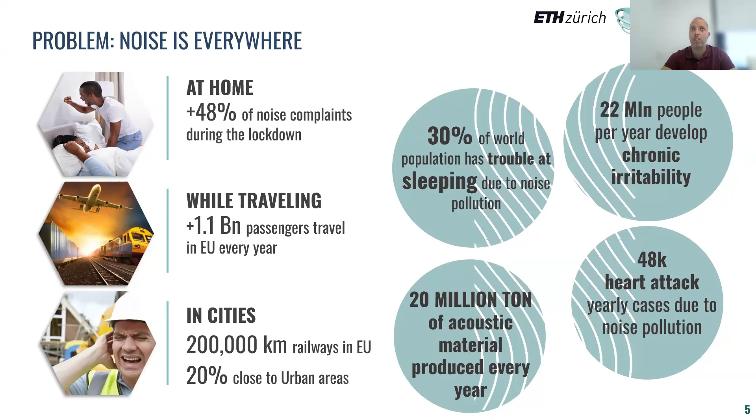Why did we choose to focus on noise or vibration? Because noise is basically everywhere. You can find it at home, as an annoyance while traveling in cities. It is responsible for a lot of health-related issues. Therefore, controlling or reducing noise and vibration can bring overall benefits, health benefits, as well as reducing the annoyance of whatever system creates this noise. Therefore, our motto, our vision, is the art of noise management.

Through our experience in noise and vibration related subjects, we developed effective, affordable, and sustainable solutions based on metamaterials, relying on existing materials or new structures or new materials. How did we do so throughout the years? We developed different applications. Therefore, we have a portfolio of 13 patents for different sectors.

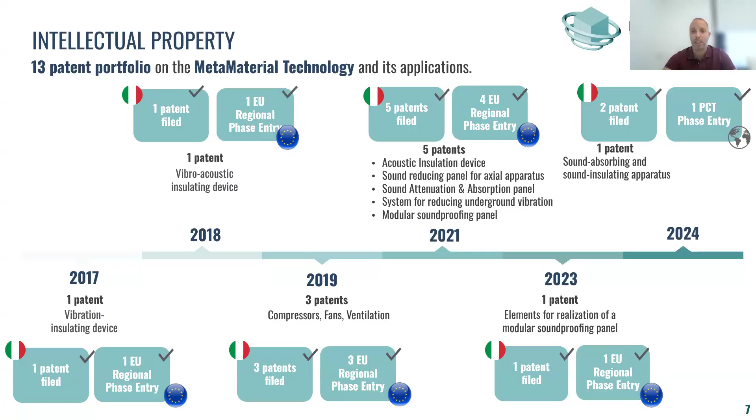But aside from all these words, maybe it's worth spending a bit of time to discuss what metamaterials are. Probably you're already working on metamaterials, most likely. Some of you are from Greece, so metamaterial is actually a Greek word; it means beyond materials. So we are not inventing a new material, but basically creating a new structure. We are modifying the structure topologically in order to control the propagation of energy in it. If we can control the propagation of energy in the structure, we can block it, deviate it, modulate it, and so on.

Before continuing, I want to ask all of you, are you experienced with metamaterials, or is it something new for you, or you just started? No, part of the group has worked with metamaterials, but not the whole group. So not totally. Your introduction.

So maybe I can spend a few more words. In general, metamaterials means all the types of structures where you can, as I said, change the topology, change the shapes to create local resonances, or create scatterers to control wave propagation. For these local resonances, for instance, in these pictures you can see features designed with an endpoint mass and a slender body that works as a mass-spring structure, or that can work like a really bulky structure scatterer.

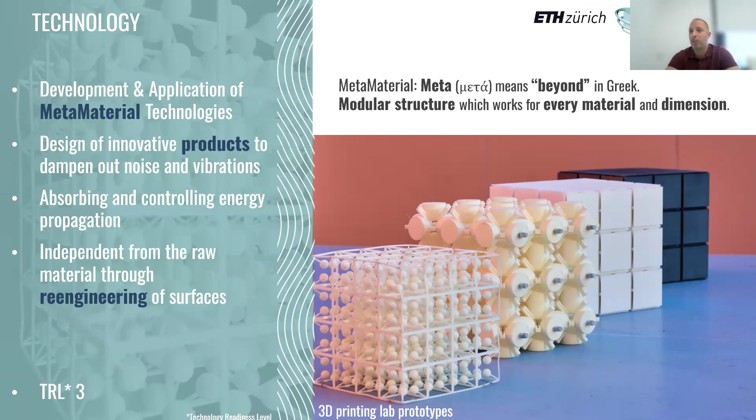So a higher TRL means that in a product, and normally the TRL goes from one, which is basically an idea, a concept, a sketch, a drawing on a paper, to 9, which is basically your final product that you can buy. So the question is, how did we scale up from a low TRL to make metamaterials into product? This is really the focus of our company and what we are working on actively every day.

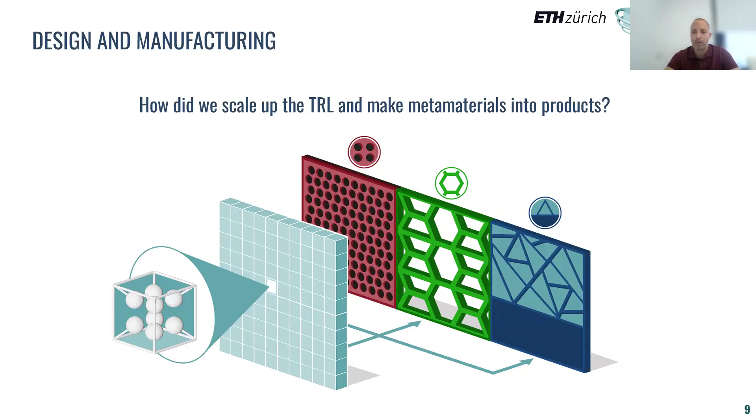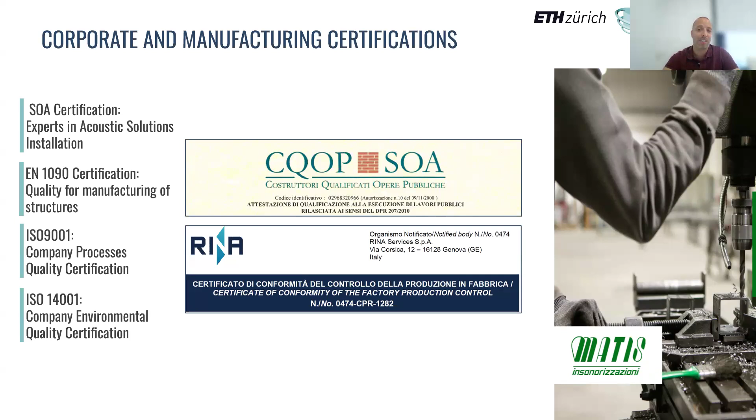So we started from the cube, and then we reshaped it, we remodulated it, we changed the topology in order to make, for instance, barriers, different shapes, or other types of products. Well, first of all, the company needs to be ready for preparing this product. So legally, it needs to have some bureaucratic stuff, for instance, certification, which is really important for companies. But aside from this, you need to focus on certain sectors. So we decided to focus on 3 verticals: the infrastructure sector, transportation sector, and appliances sector.

Each of these sectors, so we segment it, we divide it, because each of these sectors has its own features. So the type of material that it is possible to use, the type of problems, and the type of manufacturing aspects. Therefore, yes, the performance of metamaterial is exactly what we are looking for. So we are looking for a new technology that is much more performant than the current technology, and therefore we can reduce the noise or the vibration in an outstanding way. But then we need to face the costs, the material, the manufacturing aspect, which, if we segment in this way, is really sector specific.

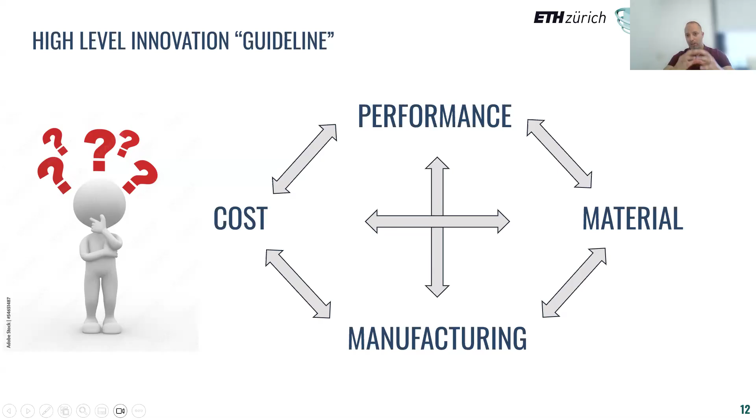In this presentation, I tried to give you an overview of how we deal with it. And probably that can be a trigger for you, for everyone, for the community, to make sure that when you design a new metamaterial solution, you put also all these 3 parameters in your metrics, and then you optimize it in a general sense. You don't look only at the performance, but you can look also at the design that includes the cost, the material, the manufacturing. Therefore, you create a solution that overall is already ready for being commercialized. But to get to that, let's start step by step.

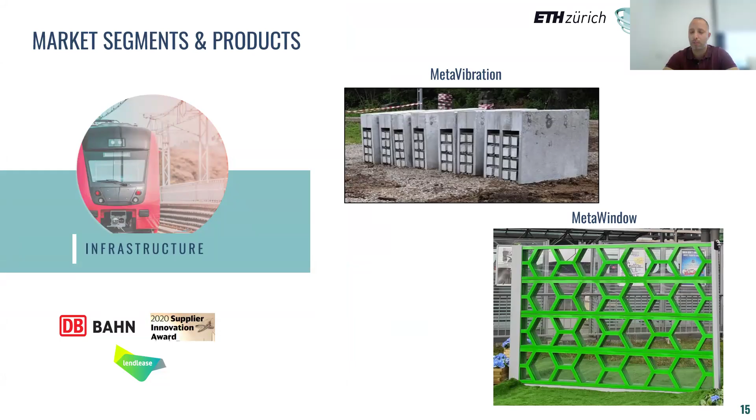So for instance, let's start with the infrastructure sector. So for the infrastructure sector, we work in 2 directions. We work for reducing the vibration, the ground borne vibrations, or to reduce the airborne emissions from, in this case, railway noise. Let's focus on the vibration. So we developed a product which is called Meta Vibration. What does this product do? So probably you're working on something similar, but what did we do?

So we have a vibration source. In this case, the train on the railway track is creating different types of waves, surface waves, P and S waves, that travel into the soil and then can damage or create annoyance in the buildings. So typically, you create some solutions into the foundation, so you create trenches. These trenches are very useful for blocking surface waves, for instance. But there is a problem with the trenches. Trenches are holes in the ground, so they are dug to create an interruption of these waves from the input to the receiver.

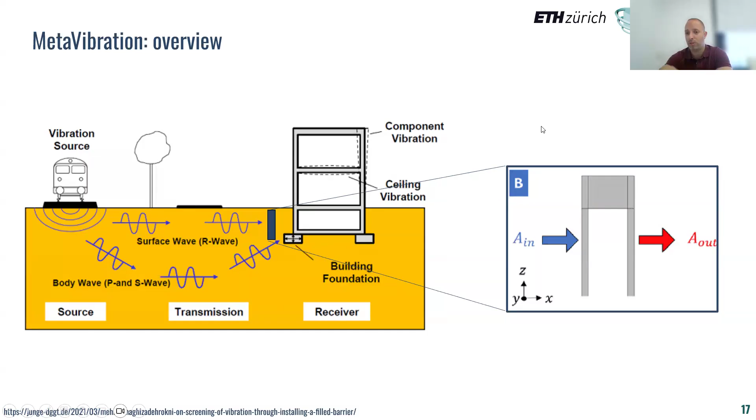And therefore, it's not always safe to have a hole in the ground, especially if there are some machineries or cars that need to pass along that way. Therefore, instead of the trenches, typically they use some decouplers like U shape or inverse U shape that can still work as a decoupler. But the question is, can we do better? Can we trigger resonances inside these decouplers to increase the isolation from the source to receiver? This was exactly the first question.

So the objective. And then in terms of innovation, we create a solution to improve the isolation at low frequency, and especially the annoyance, or at least the problem, is located around 30 Hz. And the main challenge is to integrate this resonance structure inside this solution. And aside from this, the resonance structure needs to have a bearing load capacity. Therefore, heavy structures need to be able to pass over this solution. And also the cost of the material and the manufacturing need to be aligned with the current solution.

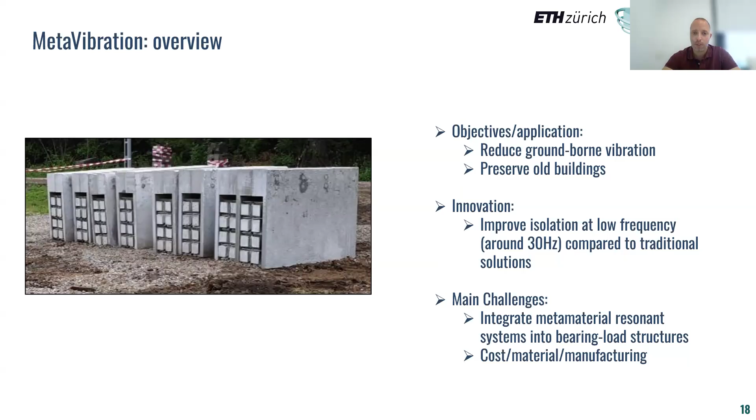So where did we start? We started exactly from the unit cell. We started exactly from a design which looks really similar to the cube that I showed you at the beginning.

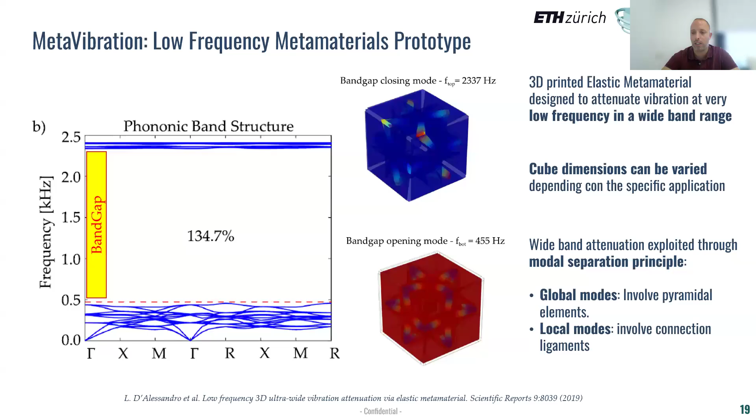Through stop band analysis, we design features inside this cube, resonant features that can enable a very large stop band in the low frequency range we are looking for. In this range, we have no wave propagation, so we can block the energy propagation. If we block the wave propagation, we can ensure the energy from one point to the other is not passing, and therefore we can maximize the insertion loss and isolation in this frequency range.

From the unit cell, we created this cube that you saw in the pictures, and then we tested it in the lab with a sensor and an actuator to verify that the stop band is according to what we designed it for.

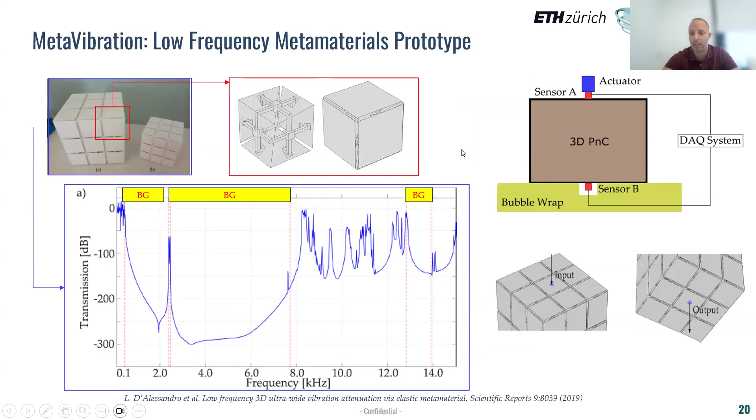Then from the concept, from a low TRL, we made the first prototype, made with the same material as the final solution. We chose concrete and steel, because in the infrastructure sector, metal and concrete is basically what is used the most. But you can imagine we need to create a resonance structure made of concrete and steel. How did we do that?

We use the steel as a spring and the concrete as a mass, which would have been the most logical thing to do. But this had to be tuned first, and secondly needed to be molded. The mold was one of the key points for the manufacturing aspect, because it's what creates and leads to the final product.

So we create the solution, we test it, and the solution is behaving according to what we were looking for. The cutoff frequency starts from 30 Hz onwards.

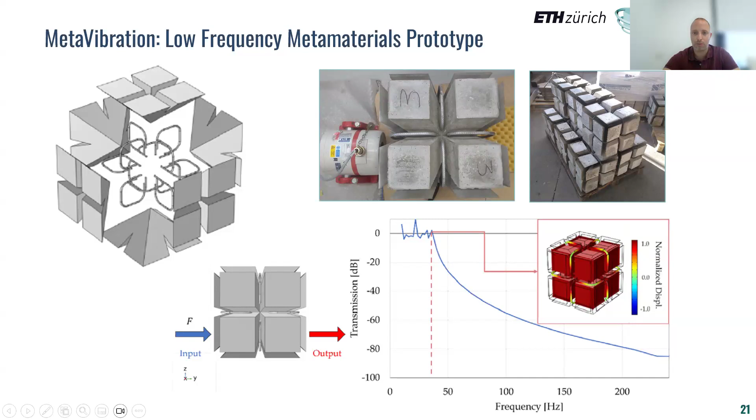Then we inserted these blocks inside this structure, and this structure mostly serves to preserve that the dirt, the ground touching the resonators, is not blocking the resonators from vibrating. This is the reason why we encapsulate this array of resonators inside this block.

With the simulations, we can demonstrate that if we have a train track here, an excitation that comes from the train, we have the vibrations and the energy propagation that can freely travel. When we add the blocks, we can really increase the insertion loss from left to right, from these trenches, from this solution.

Of course, we can block the surface wave, but the wave that travels underground is more difficult. But it is at least a good achievement and not too invasive a solution to be applied for controlling ground borne vibration.

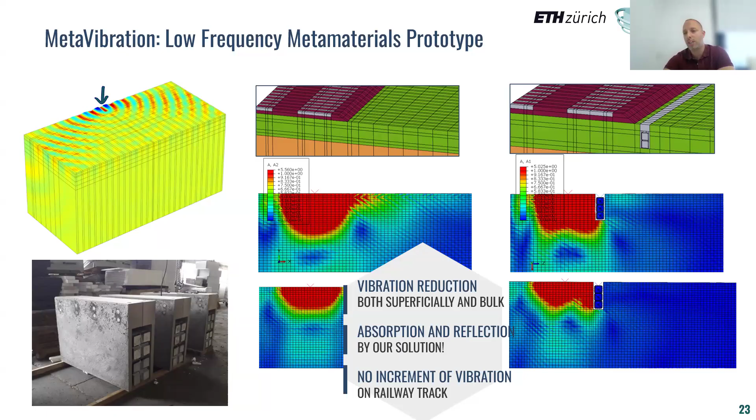Another aspect is, okay, we create this amazing solution, now this needs to be installed. When you design and make all the numerical simulations for your solution, you never imagine that there is a person who will take your solution and throw it into the hole, into the ground, without really taking too much care of it. They take a crane, drop it into the ground, put all the dirt next to it, and then decide it has to work. So they don't really care too much about how to treat them.

So what I'm saying is that when you're designing a solution, you never imagine that you also need to design it to be robust enough, not only to work as intended for blocking the vibration, but to withstand potential mishandling, people that take this and while installing it are not really delicate. This is another aspect that sometimes a designer or engineer focused only on vibration and noise doesn't really take care of. An example is exactly this: the environment in which this solution will be installed is not the most perfect environment as a lab environment.

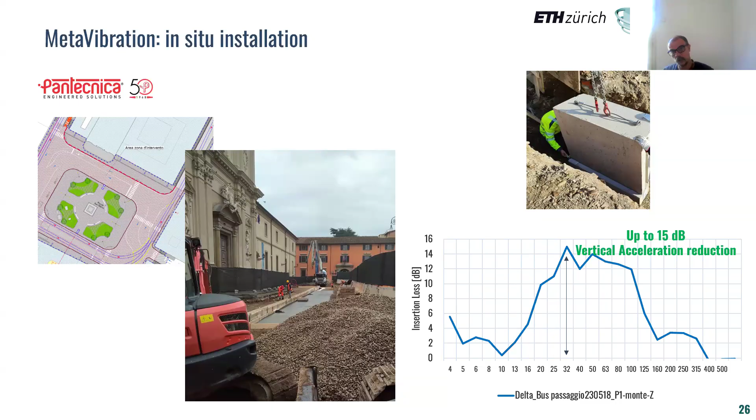Exactly. The point here is that the resonators, or the resonances, need to be triggered such that they can be pushed to as low a frequency as possible. So let's say you have an excitation of 2 hertz—you need to make sure the mass resonates at 0.5 hertz or even lower. So at the end you start to have, as you said, a much larger mass, but you're in a certain sense at a threshold where the structure can really withstand or self-support itself. Exactly. Probably this design isn't really the most effective for earthquakes—there could be other, more intelligent designs—but typically the principle is similar.

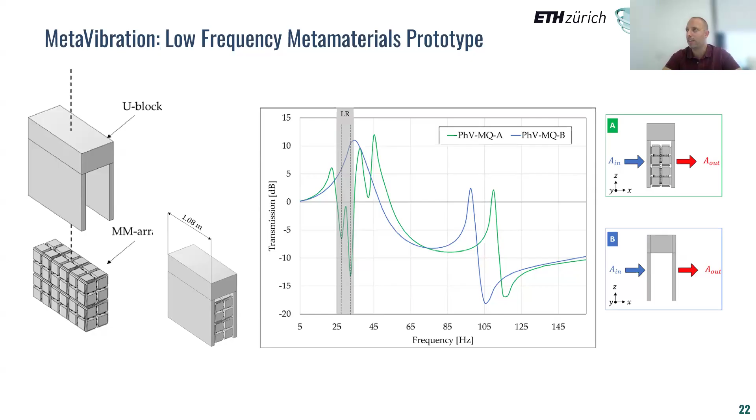Okay. Thanks. No, thanks.

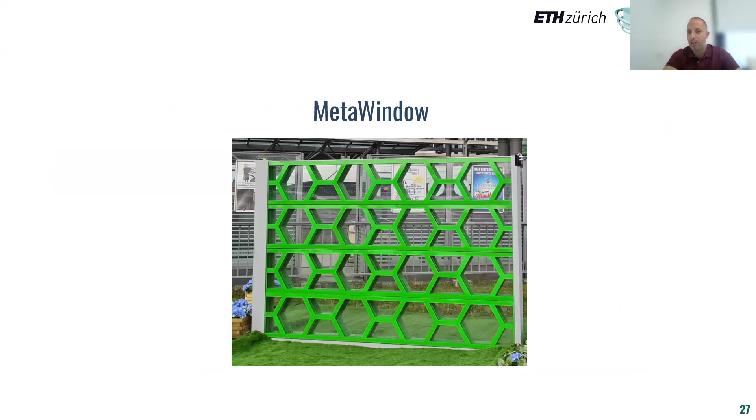So now we have discussed ground-borne vibration. What about airborne vibration—airborne noise, sorry. This is typical noise in infrastructure that could arise from the passage of a train. You can find these solutions if you travel on a train, or you've seen them on the highway. There are transparent barriers, as well as barriers that are not transparent—they are full and closed. The transparent barrier allows you to see the landscape but doesn't absorb the noise, it reflects it: the wave hits the barrier and is pushed back. For the full closed barrier, you don't see the landscape, but the sound hits the barrier and part is pushed back, while 90% of the sound is absorbed because inside there is foam absorbing material that dissipates the noise through thermoviscous losses.

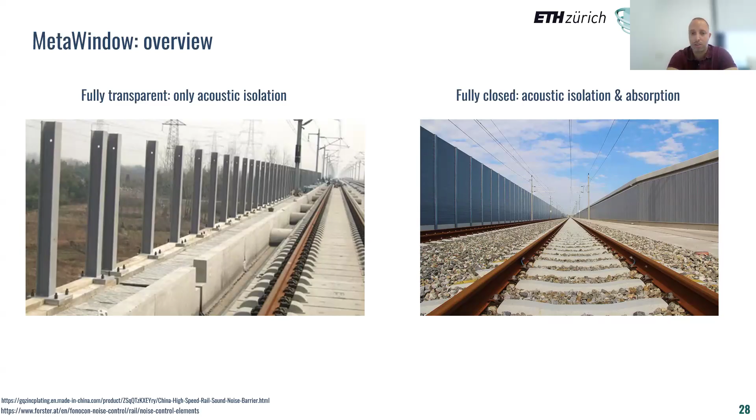The question is: is there a solution we can design that lets us see the landscape, so it's transparent and therefore doesn't have an urbanistic impact, but at the same time doesn't just reflect the sound but absorbs it? Can we make a transparent barrier that also absorbs like a full barrier? This was actually a question raised by Deutsche Bahn, the German railway company, and we worked towards this design.

It's called Meta Window—our product. It's a solution we are producing here in Milano; we have a manufacturing plant producing this window. It is 70% transparent, so you can see through it, but it also combines high absorption. High absorption means that in railways, or typically also on highways, there's a reference curve for isolation and absorption. If the performance of your solution is above this reference curve, it's considered high absorption. According to this standard, the Meta Window behaves as absorptive as a full barrier.

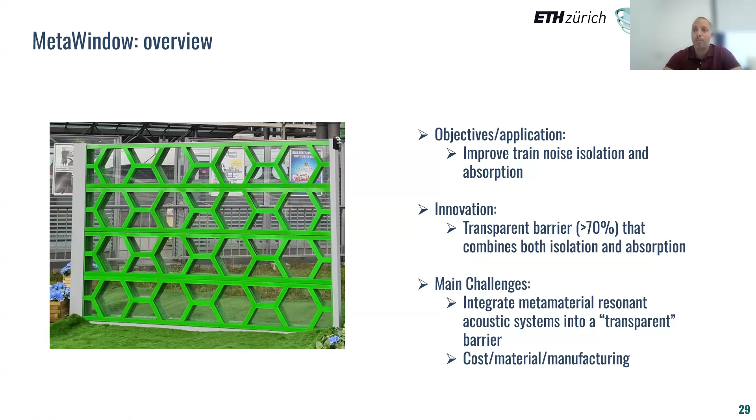But here, cost, material, manufacturing is everything related to industrialization. And industrialization is core, as it is for other products, but here specifically because in the market this barrier must cost around 400 to 500 euros per square meter. So you need to make sure that if you want to be competitive and you want this solution to reach the market, it needs to be designed in the easiest way, using the most simple, common materials, to make sure you can be competitive and land it into the market.

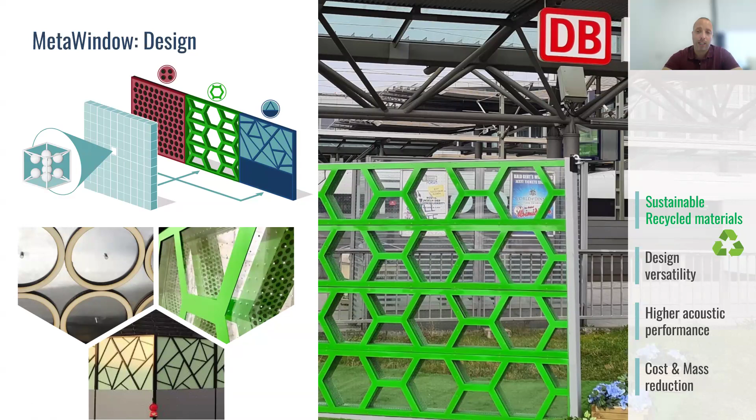Therefore, here, what did we do? We tried out different shapes. We started from the cube. We had to enable, first of all, the resonances. So we needed to first reach the target for the acoustics, and then afterwards we needed to make the system work. Hexagonal shape was a perfect design, really amazing to work with and to achieve very good performance, but it was very difficult to make, very costly.

Therefore, we redesigned everything into sort of linear shapes that could be manufactured by extrusion, and extrusion is a manufacturing process that is much simpler and more cost effective than this type of process.

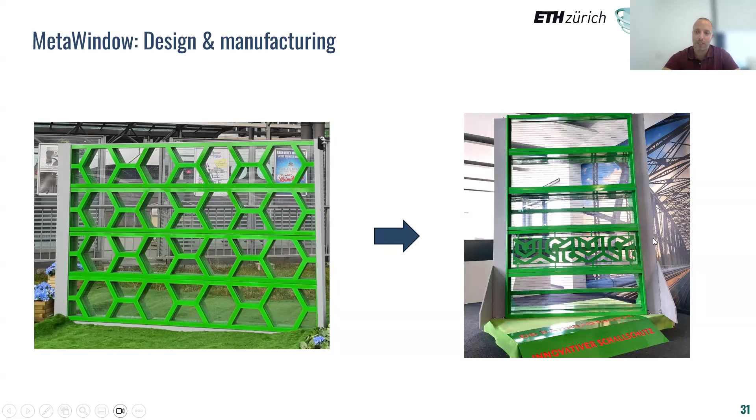Once we have the design validated in terms of performance, through tests that we made in a reverberation chamber to verify the isolation as well as the absorption of the meta window, there was one test that took us almost 1.5 years to pass, which is the fatigue test. So you have an amazing product that works for isolation and absorption, but then you have a block which is basically the fatigue test that had to run for 6 months.

We failed it 2 times, almost at the end of the fatigue test, because of a small crack that opened up next to a screw that wasn't tightened very well. The fatigue test is fundamental because you need to imagine this barrier needs to resist 50 years, needs to last 50 years next to the train track, and needs to withstand the pressure load of a train running at 300 kilometers per hour close to the barrier. So you have a suction pressure that overloads the huge panel of the barrier, so it needs to withstand all this cycle of fatigue.

So once again, here you are designing for metamaterials, but afterwards there are other engineering problems that need to be taken into account, therefore needing to be added into the design. With this message, what I'm saying is that when you design a nice solution, it's not only vibration and acoustics in this sense for metamaterial that can really make your system great, but there's another 90% of things that probably, until your solution reaches the final industrialization, you don't even see.

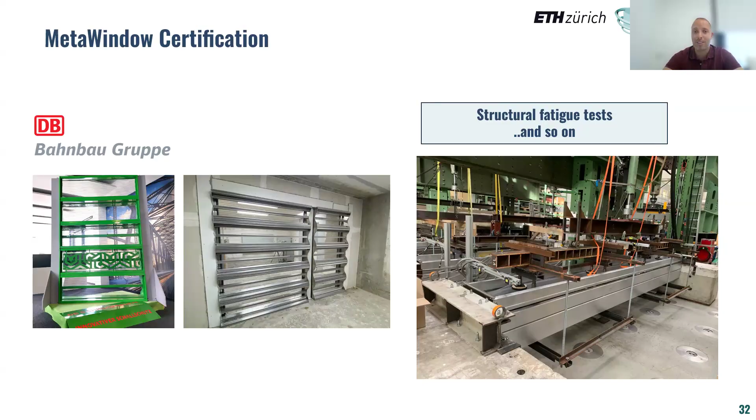This actually has already been installed. So if you are in Germany, around Munich and Hamburg, you can see this installation live. There are also some pictures on LinkedIn and on the website of Deutsche Bahn about this new product. So after a lot of effort, that has become a reality. That's what I'm saying—so what has been our journey?

So we had our objective, which we wanted to design some high performance absorption isolation solutions, metamaterial solutions for infrastructure. We have come up with two solutions, which are the meta vibration and the meta window.

For infrastructure specifically, we have seen that concrete and metal is what is mostly used. But why is that? Because the infrastructure understands in terms of material mostly this type, because they are cheap, they are easy to retrieve, and so on.

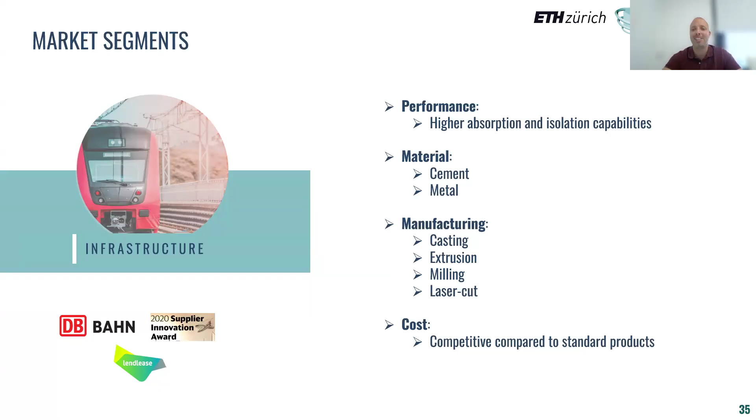Okay, this is the infrastructure. What about the transportation? I don't know if there are questions so far, but otherwise I can continue. Okay, we can push the question at the end.

So the transportation, let's say, is another world. Why is it another world? Because in transportation, we are looking for a different type of solution, or at least what transportation wants is something that is lightweight, something that is super high performant. And of course, in transportation, you don't use concrete. Metal, yes, but you don't use concrete. Which type of material do you use in transportation? You use fibers, you use rubber, you use polyurethane foams, and so on. These are typically the materials that you use, so lighter material than concrete.

And in transportation, we are working a lot, say in automotive, for instance, with Mercedes, with Ferrari, Bugatti Rimac, and Nissan. So we are working with several companies, and specifically with Mercedes, we have designed, engineered, and produced a new solution which is called Meta Design. A fun fact about Meta Design, this is the name of the product we have, is that we did not call it Metamaterial anymore, but we had to call it Meta Design, to hint that when we first presented the Metamaterial solution, people thought it was a new material, although we explained that it's not a material, it's a design. It's a different topological design.

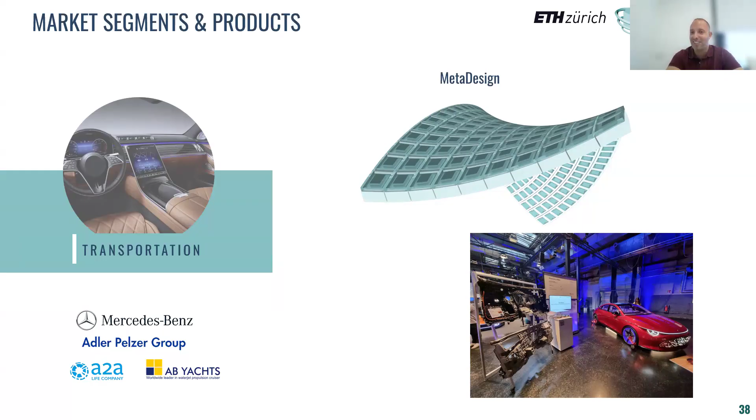Then which type of design did we engineer here? So we started by understanding which type of problem we can address here with the metamaterial. First of all, if we take a car, we have different types of energy transfer paths, or noise transfer paths, or vibroacoustic transfer paths, let's say in general. So we have powertrain noise, road noise, wind noise. One of the most annoying noises, especially for not battery electric vehicles but internal combustion vehicles, is the powertrain noise.

Here you have the firewall, which is a metal part that divides the engine compartment from the interior compartment. This firewall is basically a wall, and on top of this wall there is the sound package. This sound package is typically quite heavy. If we look at the one for Mercedes, for instance, you have 10 kilos located only in this area, and then you say, okay, 10 kilos on a car that weighs almost 2 tons.

What is the matter? But actually, it is the matter, because every kilo that you reduce, you can reduce a lot the emissions, the CO2 emissions. So every kilo, actually every gram, in a car is important. That's why there is a trend you find more and more in vehicles, that there is only the screen with lots of features, and you don't have buttons anymore. They remove the buttons to reduce even further the weight, and the cost, of course. So this is crazy if you look at it in terms of relative weight, 2 tons of car, and then you reduce 1 kilo. Yes, because 1 kilo counts a lot.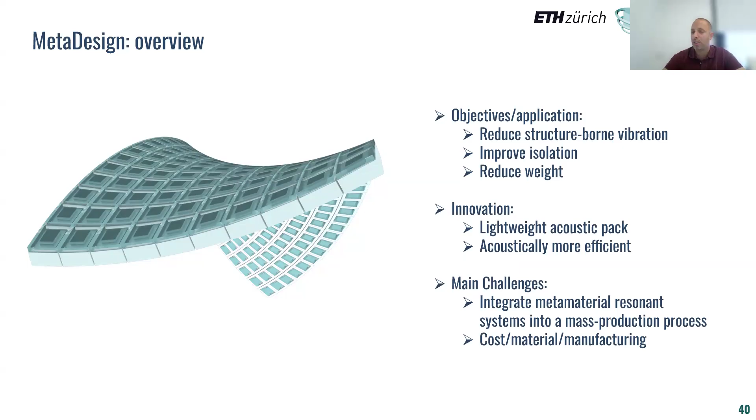And the innovation is to come up with an innovative lightweight acoustic pack based on metamaterials in order that it is acoustically more efficient. You can imagine that the main challenge here is the integration of the metamaterial with the current solutions, and especially here we are speaking of a mass production process and about 1 million vehicles per year. So the cost needs to be maintained, it needs to be easily manufacturable and robust enough that, for the speed of the manufacturing process, we make sure that once it enters into the car it works as intended.

Just to be clear, the standard design here uses standard materials such as polyester fibers or foam and so on with rubber, materials that have been used for years in automotive. So there is a bit of inertia also in changing this type of manufacturing, this type of material. Therefore, we said, first of all, in the design of the solution, we will not change the material. This is a strength of metamaterials because you are not changing the material, but you are integrating a design into a current material. And this strength enables us to maintain the manufacturing process, maintain the materials, and therefore to roll out the solution in a faster way.

And how did we design this? We designed it in such a way that we create local resonances, so distributed lumped mass spring systems into the design. Each of these resonances works at a specific frequency. Typically by design, we try to make it work at a specific frequency that opens up a stop band, so a frequency range where we can improve isolation.

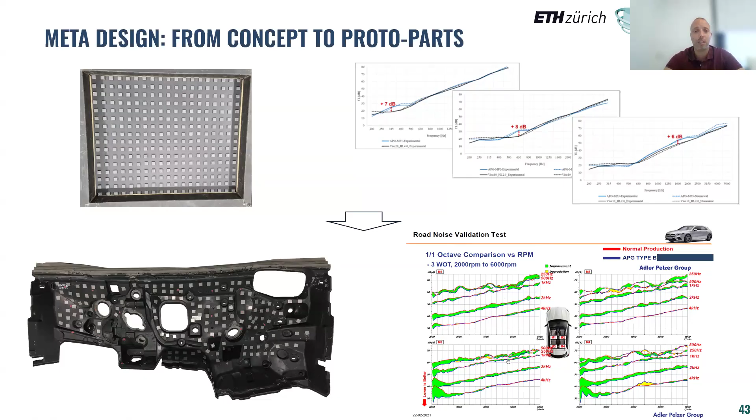And we started from a 2D design, from the unit cell 2D design, and then we applied it on a 3D element, which is basically the inner dash element in a car. And we tested it in a car. We did lots of tests on the bench, in the coupled chamber, on the vehicle while driving. And afterwards, we had to integrate it into the industrial process. In this case, the industrial process is called CIM, compound injection molding, which basically is an injection molding.

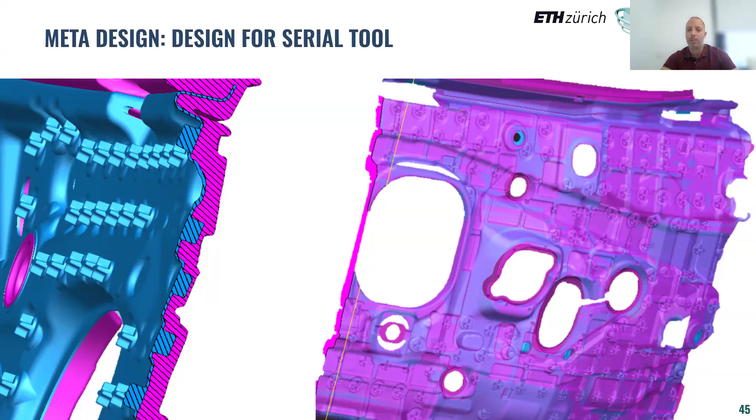And you can see it a little bit in the shadow and the translucency, this square section. So basically the combination between this added mass and this square cavity inside the foam leads to the performance that we designed it for. So this is the final product.

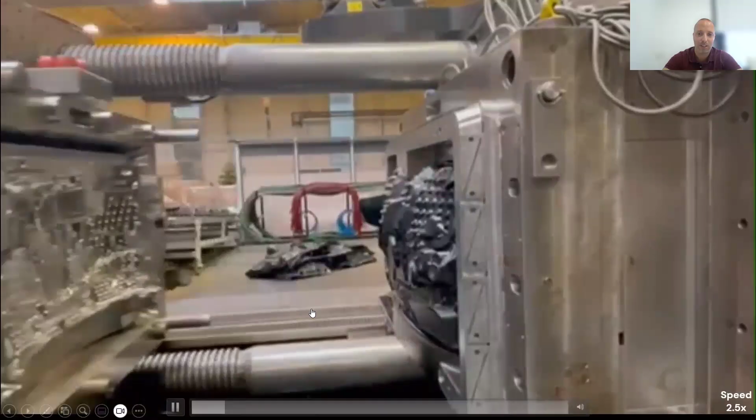And to give you an idea how fast the production of this material is, this is a video where the part is injected, then taken by a robot, carried away, and then you start with another injection. The video was sped up by 2.5 times, but okay, it is not that much slower than the video looks.

Just to give you an idea of how a simple design that you make on the console, on your FEM model, afterwards needs to encompass lots of certification and other aspects, and needs to withstand the industrial environment, for instance a robot that takes it with the pliers and then takes it out from the mold and so on.

So this meta design, basically, of course, we are the engineering company that designed the system, but for production, we did a partnership with a tier 1 supplier, which is Adler Pelzer Group, and they have the warehouses and the industrial plants all around the world. We are not there yet, so we don't have the plants all around the world to make the production for Mercedes. But thanks to this collaboration, we could bring the solution inside the new Mercedes CLA. So if you're curious enough, you can buy your CLA, you can strip it down and look for the metamaterial solution.

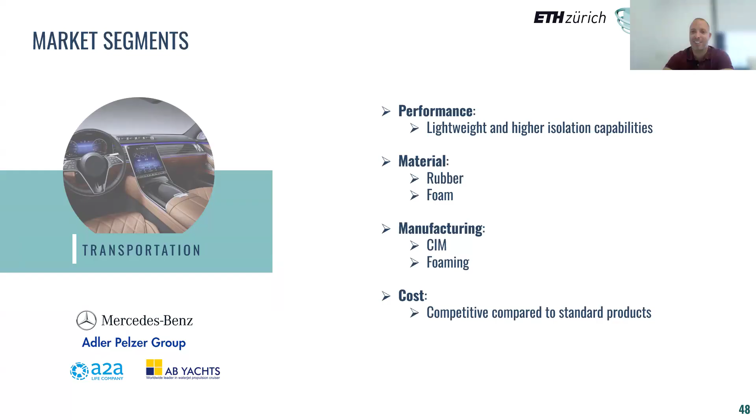Since you said that... you're fading a bit. Your voice is fading a bit. I cannot hear you really well. Okay. I will try to speak up. Now it's better. Now it's better. Okay. I don't know if you heard my question.

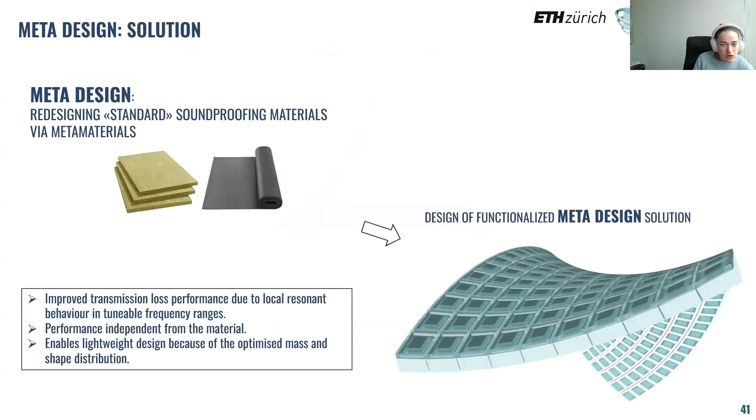I was saying that you said before that you were suggesting two solutions. Like one was more lightweight. Yes. This one. But the acoustic performance was the same, and the other, for the same mass, you had an enhanced acoustic performance. Which solution is typically preferred by the automotive companies? That's a very good question.

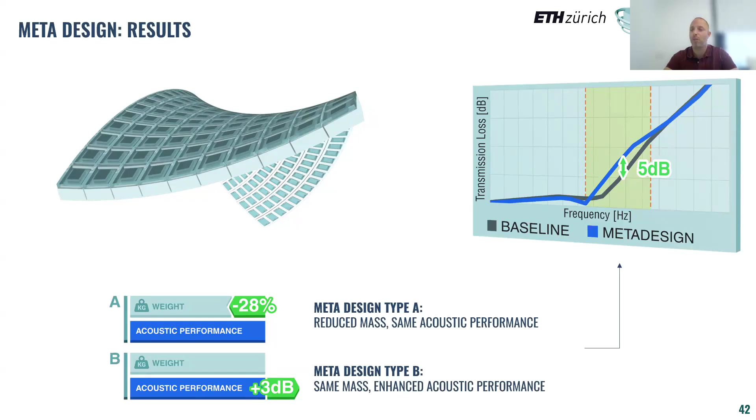Typically they always try to go for solution A, but there are premium cars. For instance, for Mercedes, there is the S class or the Maybach that are kind of limousines. They are really crazy cars for rich people. They look for comfort. So if you look for comfort, you can go for option B. But let's say 80%, 90% of the time they go for solution A because, as said, they try to reduce as much the weight, reduce as much the material that you're using in the car, but still maintaining the equal acoustic performance. Okay. I see.

No, I guess you can continue, we should be able to wrap it up until 11. Yeah, so I'll be really quick for this one, and then I'll go for a great summary.

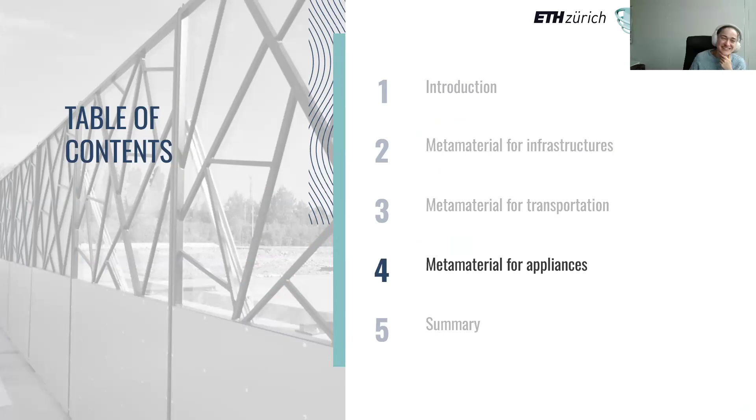For the appliances, here is a sector similar to automotive. Here we are looking for solutions that are very cheap because for appliances we go for kitchen hood, fume extractor, washing machine, dishwasher, and so on. For this, we have developed a solution which is called Metapanel absorbing, basically a micro-perforated layer with a backing cavity. What is the issue here? The standard solutions that are used basically use melamine foam, which is an absorption foam, and they cover it up with a layer.

So they want a very good solution, which is called melamine. Probably you know it. Melamine is very good in acoustic absorption, but because of fumes, dust, grease, and so on, they need to cover it up with a layer. Therefore, you choose a very good solution, but then afterwards you cover it, you basically spoil all the acoustic performance.

In fact, you can see it here in the graph: the acoustic absorption of the melamine foam rises and increases steadily with the frequency, where one is the maximum absorption and zero no absorption. Low absorption for low frequency, but it's normal. When you cover it up with this layer, you get just a bump of absorption around 2000 Hz, and afterwards the absorption is very low. Therefore, it's not really an ideal solution.

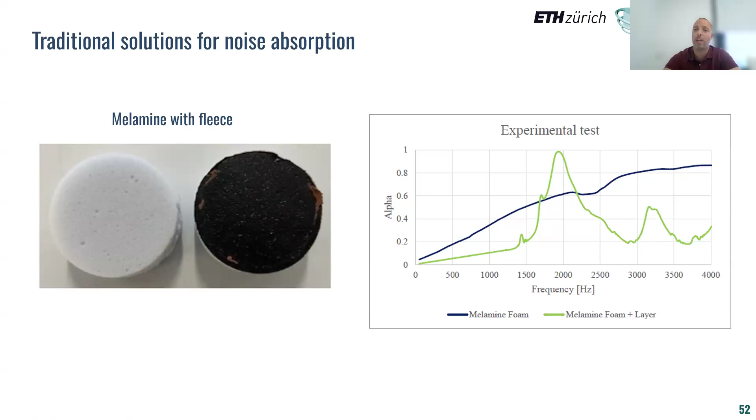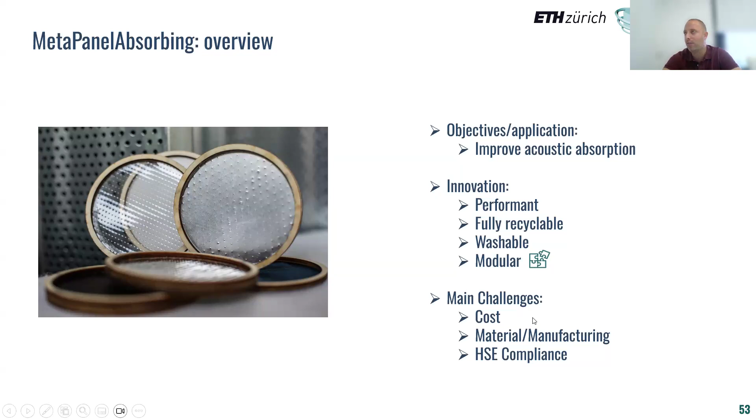Here, the thing is, mostly for appliances, we're looking for absorption, so acoustic absorption and reduction of the noise, and not isolation. And the solution has to be modular for sure, washable, fully recyclable, and of course performant. The challenges, of course, are costs, manufacturing, HSE compliance or health-related compliance.

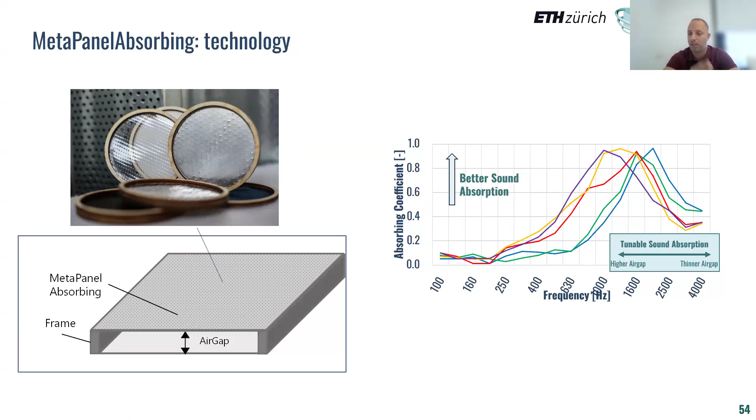As said, we have created this solution, which is a micro perforated panel with a backing cavity. Why did we choose this backing cavity? Because this can shift the absorption coefficient to where we have the most critical annoyance in the frequency. And this enables us to fine tune our solution and address more specifically the noise that we are looking for.

How did we do that? Also here, given that the solution is really cheap, we needed to find a manufacturing process that is also really cheap. It's made with a continuous process with cold micro perforation, in layers, as well as injection molding for the backing cavity.

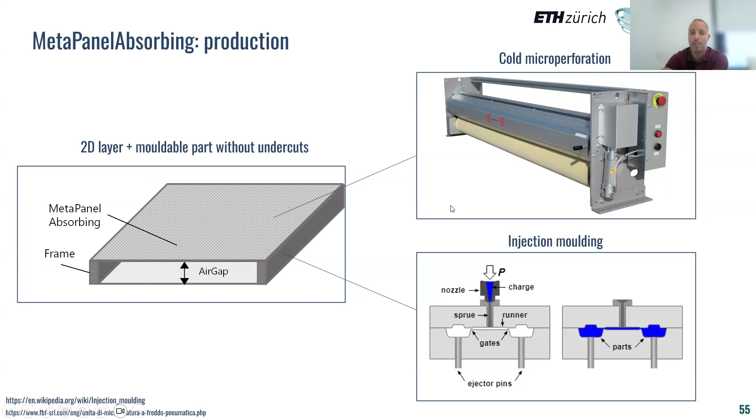And this enables us to, for instance, apply this solution in a kitchen hood. This is with a very well-known kitchen hood manufacturer in Italy called Elica, and we could reduce the noise emission of a kitchen hood appliance by 2 to 5 dB.

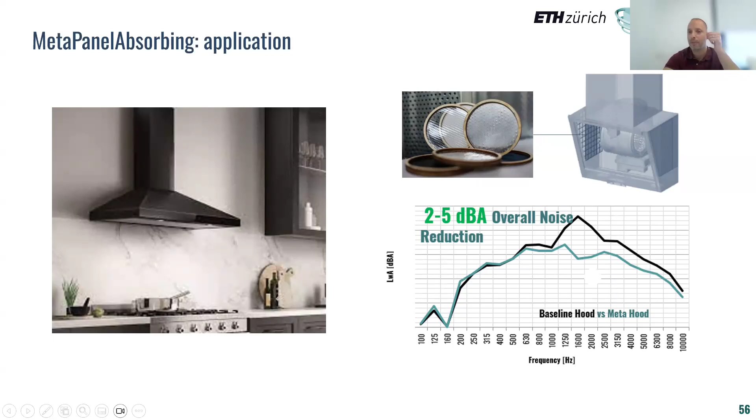It depends on the work rate of the machine, but this is the peak that, thanks to our solution, we could kill. Therefore, you get a more flattened spectrum, and with a more flattened spectrum you get better noise quality.

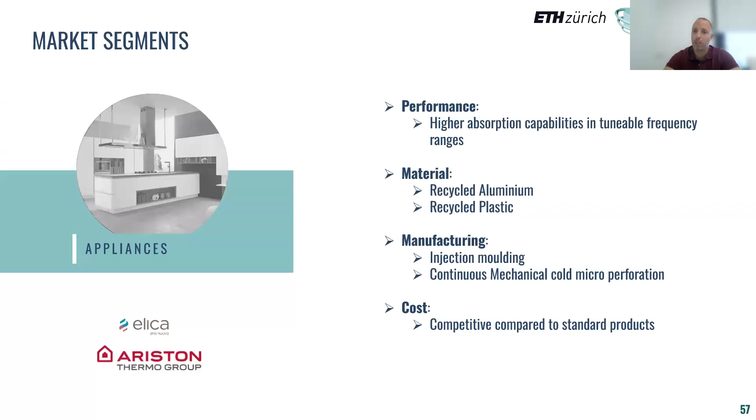So once again, the topic of this market segment is that it's very competitive in terms of cost. Therefore, our solution needs to be competitive as well compared to the standard product. And again, here it's different from automotive. It's a different type of material, different type of technology. Therefore, you need to rely on plastic or aluminum, for instance, for the manufacturing of this solution.

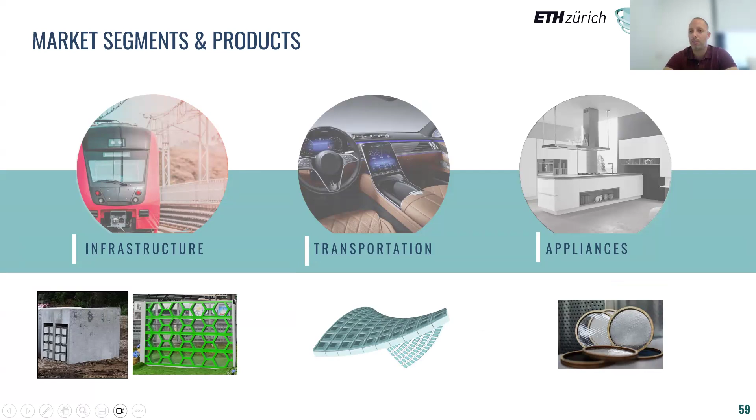To summarize, we have explored three verticals: infrastructure, transportation, and appliances. Each of them has its own type of material and production process. And if you look at the overall performance metrics that we saw at the beginning, of course we always look at performance, but there is a big part of the design which relies on cost, material, manufacturing. The innovation guideline that we have learned in the field is, first of all, you need to comply with the material which is currently used in the sector. This already saves you a lot of headache.

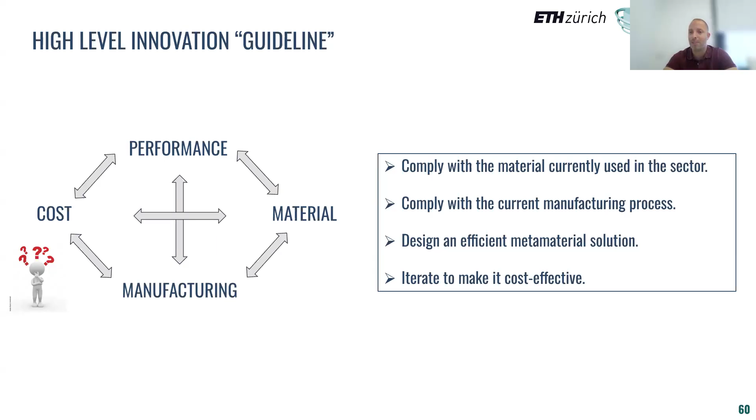You need to comply with the current manufacturing process. This really enables you to bring the solution into the market. And then, of course, design an efficient metamaterial solution, taking into account these two bullet points, and then iterate to make it cost-effective. I know these 4 bullet points could be quite obvious at the end of this presentation, but this is the guideline that we keep iterating on every day to make this metamaterial solution a reality. With this, I thank you for your attention.

I think I've been a bit longer than expected. I don't know if there are specific questions in the remaining time, but I'm happy to reply, or you can drop me an email later on. No problem. Thank you very much, Luca, for your presentation. It's actually okay. We also answered a couple of questions during the presentation, so I guess we are on time. So, are there any questions from the audience online? You can unmute yourself and ask any questions to Luca.

I don't see anything, but I can ask a question. You said that the goal of the company is to increase the TRL of certain solutions, take it from one level and bring it closer to application, right? Yeah. So do you have collaborations with institutes or universities where you take their solution and try to increase the TRL, or are these solutions that you have already developed in the past and are now increasing the TRL?

Yeah, that's a very good question. We work in both directions, in the sense that there are projects in which a company comes and says, okay, I have this solution, how can we make it better? Therefore, we already start with quite a high TRL because it's already a product. We modify the product, we insert the metamaterial solution in it. This is option one. And it is quite short term, meaning the project can last from a few months to a maximum of 1 year.